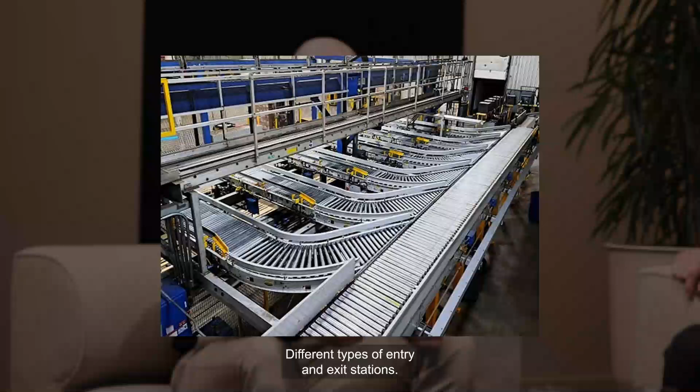Together, we would like to speak about safety in automated warehouses. If any questions come up, please send an email to safety@axelent.com. This webinar is all about safety in automated warehouses, which often feature different types of conveyors with turning and lifting stations, sorting machinery, storage and retrieval machines, also called SR machines, different types of entry and exit stations, packaging machines, AGVs and AMRs, and also manual order picking stations.

Most of these features have been around for many years, but AGVs and AMRs are quite new. They play a major part in mobile automation, and especially in the goods-to-person sector. So, Matthias, could you briefly tell us what AGVs and AMRs are, what the difference is between those two, and what is meant by goods to person?

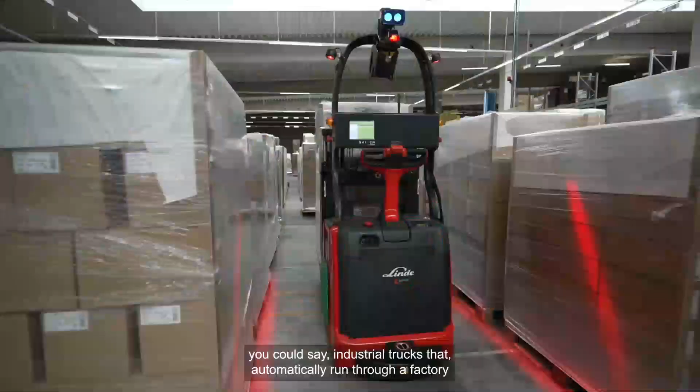AGV stands for Automatic Guided Vehicle. They are industrial trucks that automatically run through a factory, in former times often along induction cables in the floor, but now they are mostly laser guided, and they bring goods from one point to another, from a warehouse to persons. We should talk about that still.

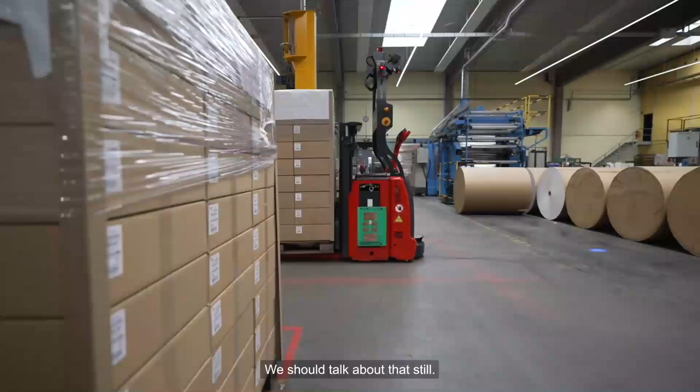AMRs are autonomous mobile robots, you could say the next development stage of an AGV. They are even more flexible, have their own onboard intelligence for finding their way, and some also have real Cartesian robots on top that can pick things from one location, bring them somewhere else, and drop them in a work position.

Both of these systems are involved in what we call goods to person, goods being carried from a warehouse to the person who is to pack them, specify an order, or do a job with them. This saves people from running around a warehouse, wasting time that could be used efficiently for something else. The opposite of goods to person is person to goods, which is the more classic way.

A person roams the aisles, picking the materials he needs and then packing them in boxes. But also in these systems, in a person-to-goods system, you would also see AGVs and AMRs today, because the person can place what he has picked on a special vehicle for further processing in a different location.

Thanks for the first definitions into the topic, but let's continue. I also mentioned mobile automation before. The opposite of it is fixed automation. Could you give us a brief explanation and example of fixed automation in warehouses, just for better understanding? Fixed automation refers to machinery that is stationary, that cannot roam the factory, like conveyor systems.

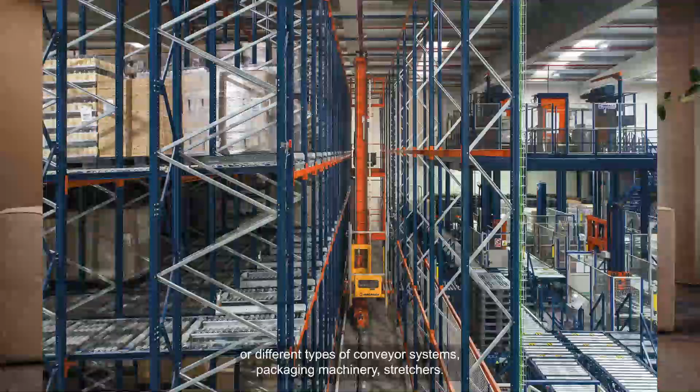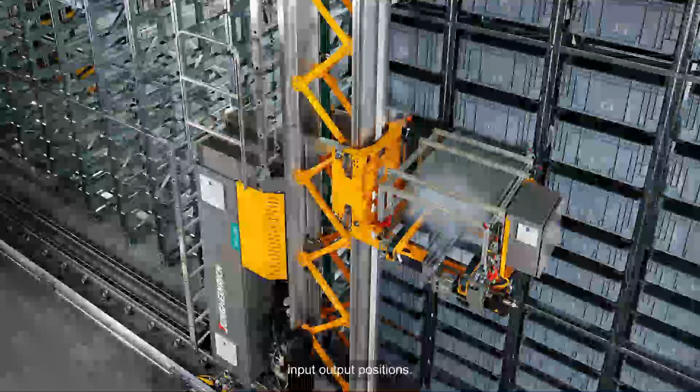Or different types of conveyor systems, packaging machinery, stretchers, and of course also so-called SR machines, storage and retrieval machines, that run fixed aisles and pick stuff from shelves and bring it to input-output positions. These are referred to as stationary or fixed automation systems, the main difference being that they cannot roam the factory.

So, Sven, what would you say are the primary safety concerns in automated warehouses, for instance with the SR machines? I would say crushing and shearing at the entry and exit points, and also the high speed of these vehicles. They follow rails, they're heavy, and you can get seriously crushed.

Do you also see some risks with the conveyor belts? Yes, there are heavy loads sometimes, banking up, and you can get crushed or sheared. They can also fall off, for example. And there are lifting stations where you can get hurt.

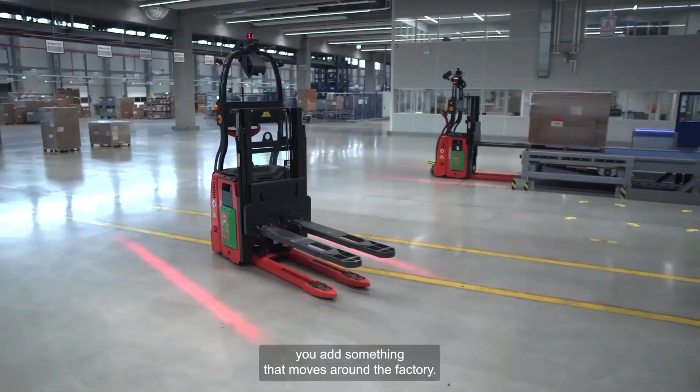Matthias, you defined the AGVs and AMRs. How do they add to this general risk situation? That was about risk situations in stationary machinery. Now with AGVs and AMRs, you add something that moves around the factory, so they move around people. Of course, they use sensors so they don't bump into people, but they could.

And then also people are moving, so it's a dynamic hazard situation. Another problem I see is that while people work, they will not naturally pay attention to AGVs and AMRs roaming. This might bring up additional hazards for people and also disturbs the machinery.

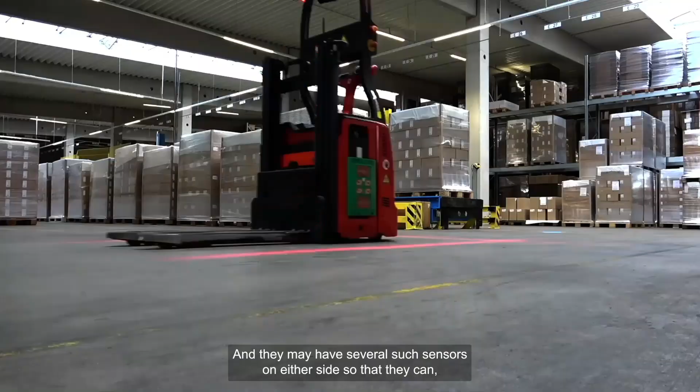So you mentioned sensors before. What types are used and how do they detect people? Can you explain? The main sensor type used is a laser scanner that is usually installed so it looks out from the vehicle at a level of roughly 100 millimeters. They may have several such sensors on either side so that they can see if something is in the way, detecting objects or feet and so on.

And for emergency cases where an object gets in their way, many of them also have bumpers that are contact sensitive and stop the vehicle upon impact.

And some of the AMRs, they also have vision systems, 3D camera systems that allow them to detect the entire environment, but these are not safety-related video and 3D interpretation systems. They're just for orientation of people, of the area, no?

But it's important to understand that all of these systems don't have safe 3D vision. So things can get overlooked. People can get overlooked by these systems. It sounds like a little problem. So why is that a problem?

These laser scanners, they scan at a height of 100 millimeters, and they can see the legs of people. But when it comes to an outstretched arm, it will be difficult, and you can get pinched or crushed into a fixed environment like shelves or such things. And also when you lean over the vehicle, the scanner can miss you, and you can get crushed by that reason. But to crush an arm, you would need a rigid object nearby, right?

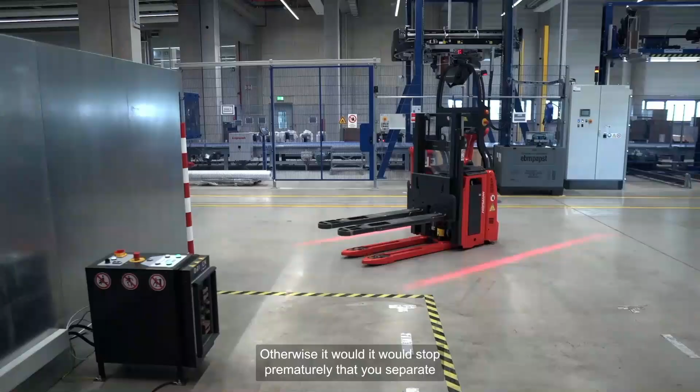It's very important wherever AGVs or AMRs are unloading or loading, or if they're approaching a charging station that's particularly hazardous, because that final approach, the sensors actually switch off, otherwise it would stop prematurely, that you separate that area completely from people. You don't want free access. It's good practice to put them against a building perimeter, for example, or we recommend the use of what we call awareness barriers.

So, I've never heard of an awareness barrier. What's that? They're a type of barrier that's not designed to restrict access, but they notify you that you're leaving a safe area to a potentially hazardous one, and they can be quite low level as long as they don't represent a trip hazard. And you need to be careful about the placement. You don't want them to interfere with the sensors of AGV or AMRs, because then they'll mess up the operation. So you need to consider where you place them.

And could you think of any other applications for impact protection in automated warehouses? There's lots. So all of the types of systems these guys have mentioned already, and any other valuable infrastructure. Pallet racking is more than often used. The actual site infrastructure, the assets like the power supplies, any fire systems, sprinkler systems, this kind of thing.

And inevitably, no matter how good your automation is, you will need manually operated vehicles as well, be them hand trucks or manually driven forklift trucks. So wherever you have those things operating together, it's always good practice to define pedestrian routes and vehicle routes. And we have the perfect products for that, like our pedestrian barriers, and you can combine them with our impact barriers to do exactly that.

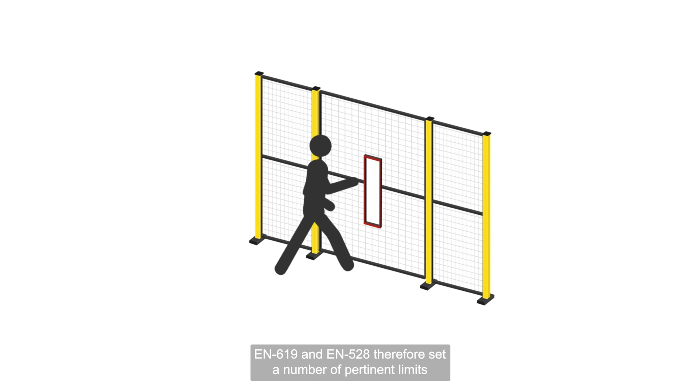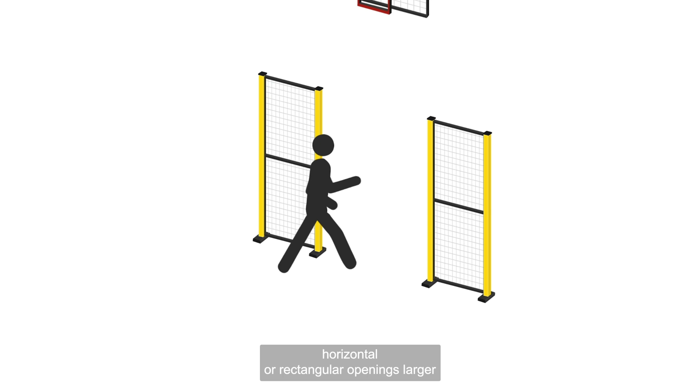The standards EN 619 and EN 528 set a number of pertinent limits to both the maximum sizes of openings and the space that may be left open between goods passing in and out and external guards. The following opening sizes are considered to allow access with the entire body: square or circular openings of 240 mm, horizontal rectangular openings larger than 180 by 300 mm, or vertical rectangular openings larger than 800 by 180 mm.

These dimensions are given in a new draft ISO standard, and also in the US and Canadian standards.

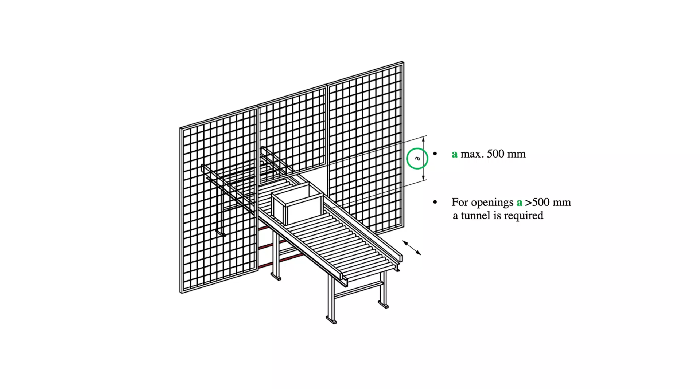More than anything else, crushing and shearing must be prevented in automatic warehouses. Here are some limit values. A clearance of 500 mm between moving elements and fixed adjacent objects or guards is generally considered safe. Where arms may be in danger, the safe distance is only 120 mm.

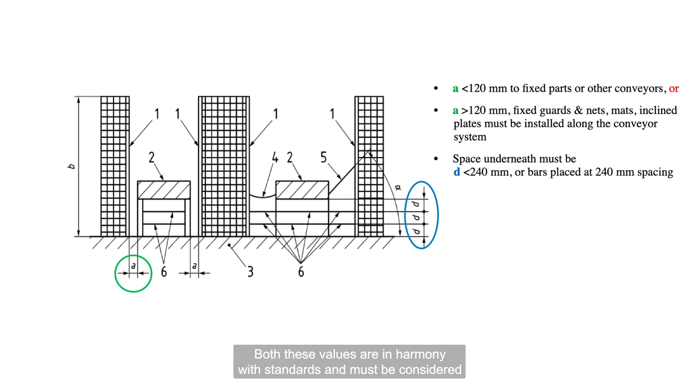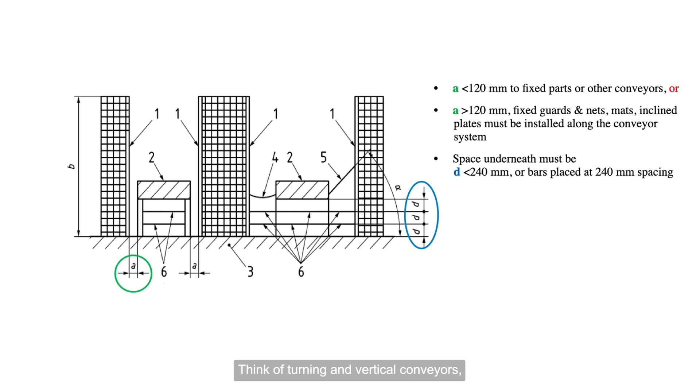Both these values are in harmony with standards and must be considered in many situations occurring in automated warehouses. Think of turning and vertical conveyors, stacking machinery, etc.

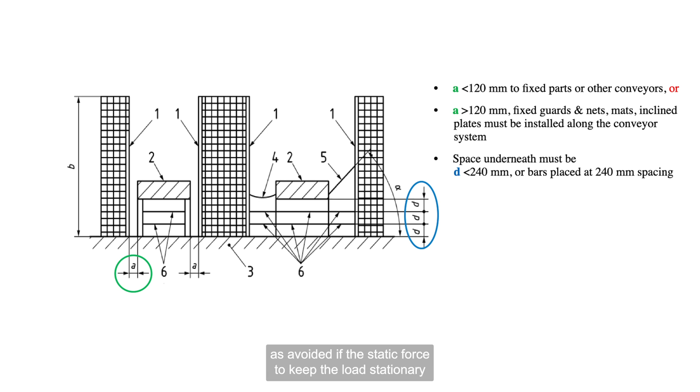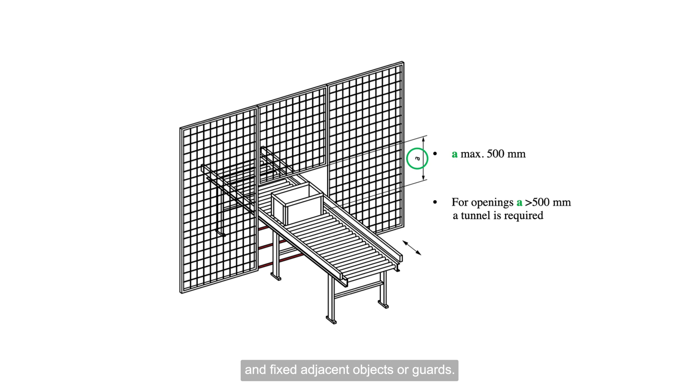Shearing and crushing hazards may be considered avoided if the static force to keep the load stationary or deflected is less than 150 Newton. For clearances from 120 mm to below 500 mm between conveyed unit loads and fixed adjacent objects or guards, crushing and shearing points require different types of safety measures.

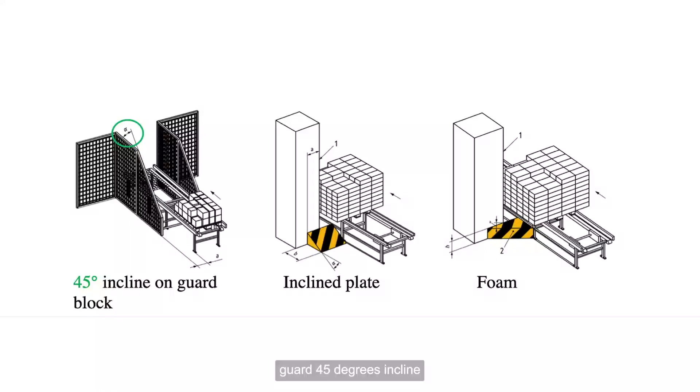Matthias, any more ideas on this? Well, at the entry and exit points of conveyors to a dangerous system, you might also have an inclined guard, 45 degrees inclined in the direction of the goods traveling in.

The idea is that this would push an arm away that might be held in between there. And then, of course, you always want to look out for those 120 millimeters or the 500 millimeters that Sven already mentioned as safety distances.

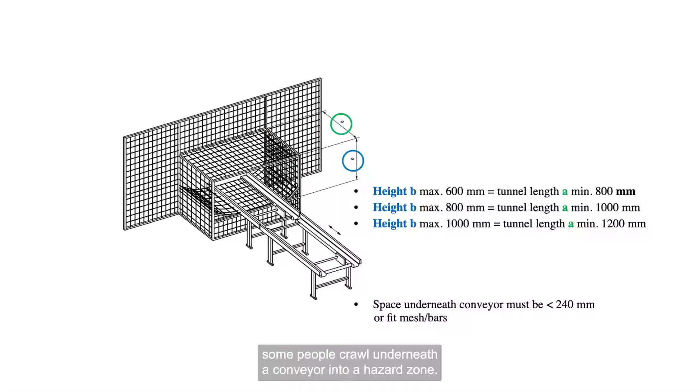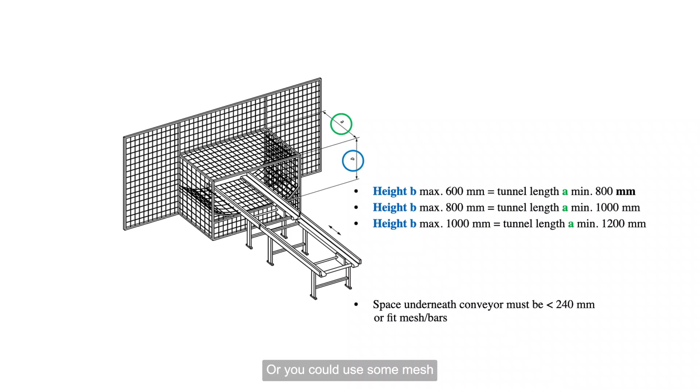There's one more consideration: believe it or not, some people crawl underneath a conveyor into a hazard zone. And that's possible, as we learned from these dimensions, if a slot more than 240 mm high is available to do that. So you would have to ensure that such space isn't there, or use some mesh or an individual bar to make the slot smaller so that people can't crawl in.

And as for the summary, what would you say, how can customers come up with a safe warehouse environment? Maybe you can continue, Matthias.

Well, aside from knowing the standards, the most important thing really is to do proper risk assessment in the planning stage. That's particularly important if you renovate or modernize systems, that you study carefully what you want to do.

Don't just focus on hazard situations, on moving parts that can cause danger, but focus on the tasks and the operations. What will people do? What is the job of the machinery? Then try to identify the hazards involved in those tasks and operations.

And from the standard, select the right type of solution. That's what we use all over in production machinery, task-based risk assessment, and I would also recommend this here.

So Marcel, is there anything you would like to add? Yeah, I completely agree with Matthias. I think it's a very good idea that wherever you've got any vehicles operating in an automated warehouse, whether they're automated or autonomous or driven by people, you want to try and separate them from pedestrians, create a safe pedestrian area and a clear designated driving area.